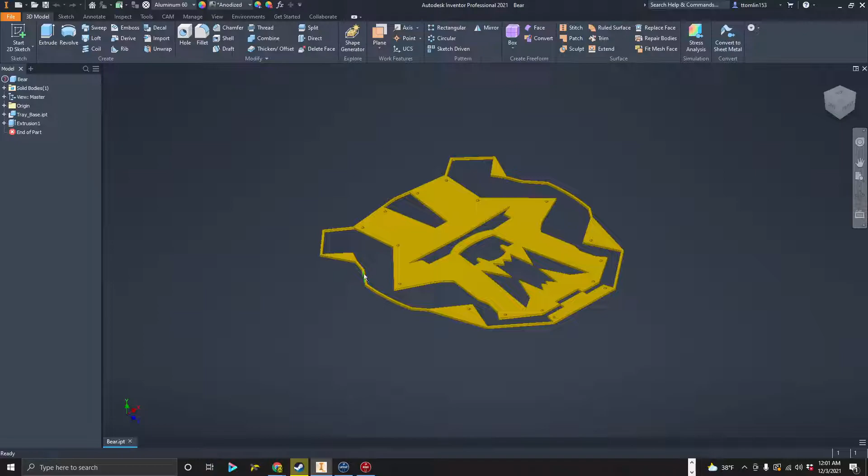Now once you've done that, we will go ahead and begin the process. To begin with, we want to go to our 3D modeling software, aka Autodesk, and if you're looking at it from this view, you want to do a top-down or whichever way you want to be exporting your view, because however you're going to export it, it's going to export what it's looking at right here. So zoomed in, zoomed out, you have to just be about right here.

Now we will go ahead and do File, we'll go to Export, we want to do Image, make sure that it's a JPEG file. We will find where we are going to be saving it, aka on my flash drive. I'll go to my drawings, I'll go to my example, and I'll do save. Now I've saved it, it will have taken this screen and put it into a JPEG.

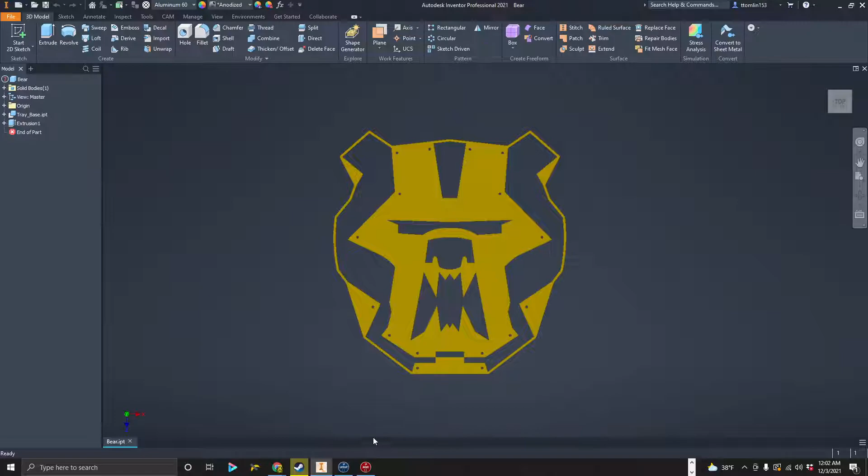After I've done that, I will go ahead and go to my convertio. I will go ahead and choose my file by going through, and there you go. Now I will convert it to a CAD DXF. We will take 2 seconds and wait, and boom, there you go. Oh sorry, still taking a few more seconds to download, it's a little bit on and off, Wi-Fi speeds. Now we will go ahead and do download, and we've got it.

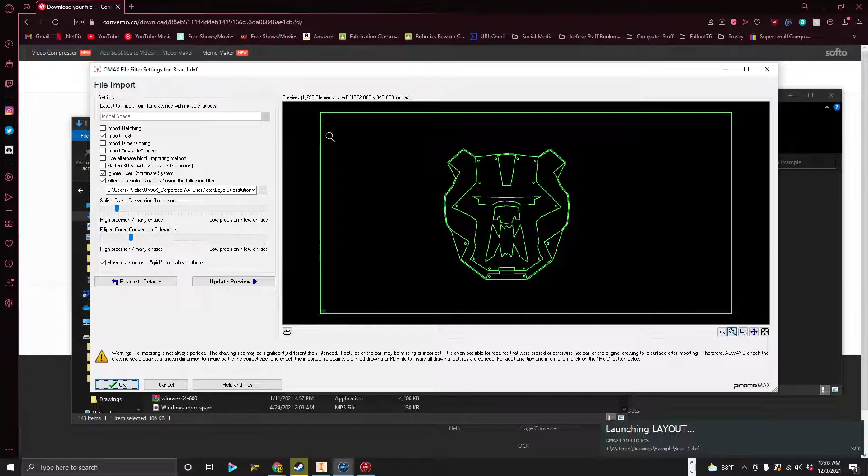So we will go to our downloads and we will open the flash drive. So this is the DXF. We'll move the DXF over to where we keep our JPEG. Once you've done that, we can go ahead and double click it, or you can open it through ProtoMAX layout, but it's better to just open it through here. Double click it, and there you go, it's popped up. Don't have to worry about anything in here, just go ahead and hit OK. Now it'll launch it up through there. Good to have it open already, because you don't have to wait for it to launch otherwise.

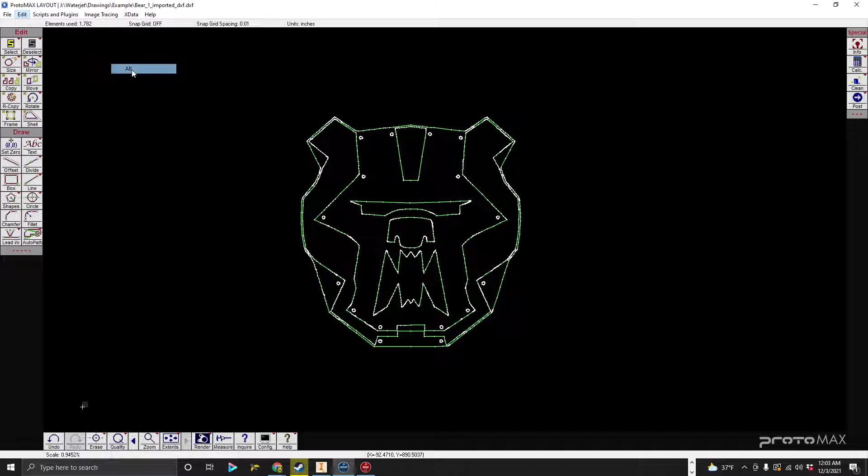Now we will go ahead and make sure we deselect all. We will go to edit again, and we will select what is connected. So we'll click this line to go ahead and delete this box, and we will go ahead and select all. After we've selected all, we'll do Control C. We will delete this, we'll hit your home key to go down here to your actual bed view. Do Control V, and now your part should be in the exact middle.

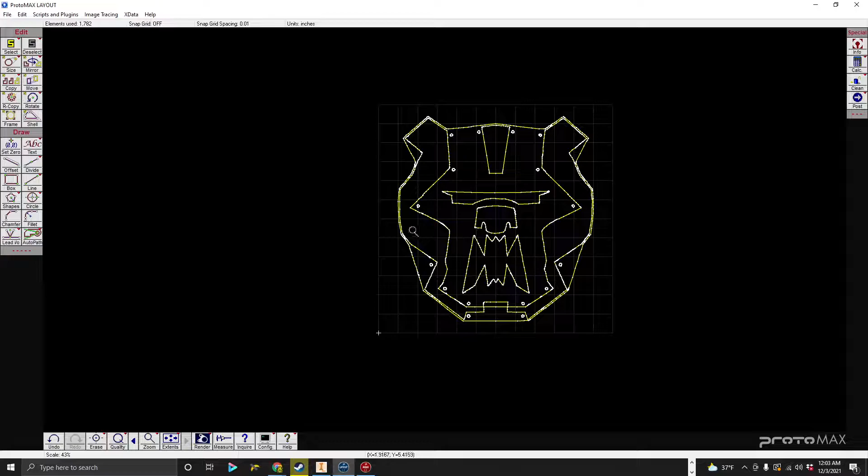Now what we want to do is scale it down so that it's not so big. In my case, I want it to be 10 inches, and it'll automatically fix everything and move it down to the bed. Remember that the Waterjet cutter is actually rather small, it's not bad, but it is only a 12 by 12 bed, each square indicating 1 inch. So you want to make sure that your parts are actually fitting within this area. If they're not, then it just will not be made, because it'll reach its limit.

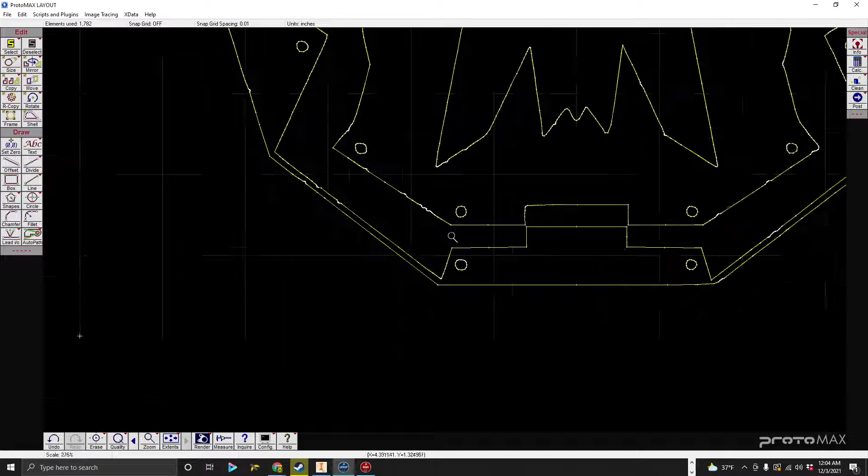Another thing you might want to worry about is weird lines like this, so for an example, I'll go ahead and fix that. Also, you want to worry about where you set your home, or your point, I guess you could say. So there's our 0, and our 0 is in that corner, just like it typically is on the machine. The machine always sets a home right in the corner. So we'll go ahead and just use that corner actually, because our stock will butt up to it.

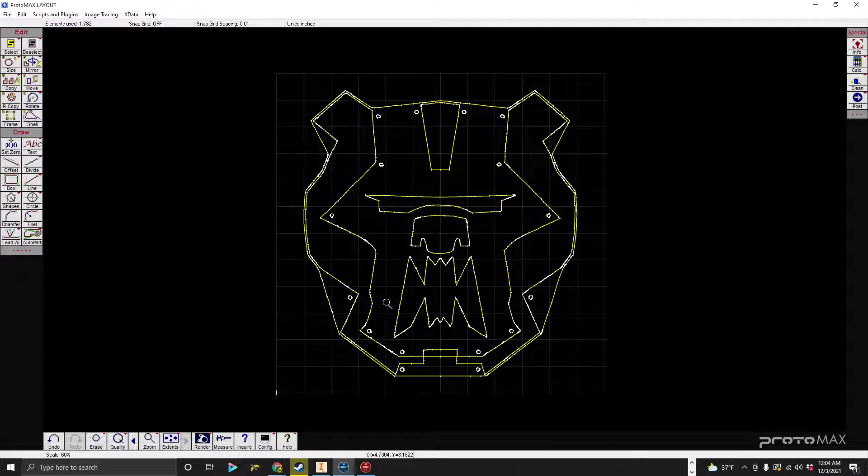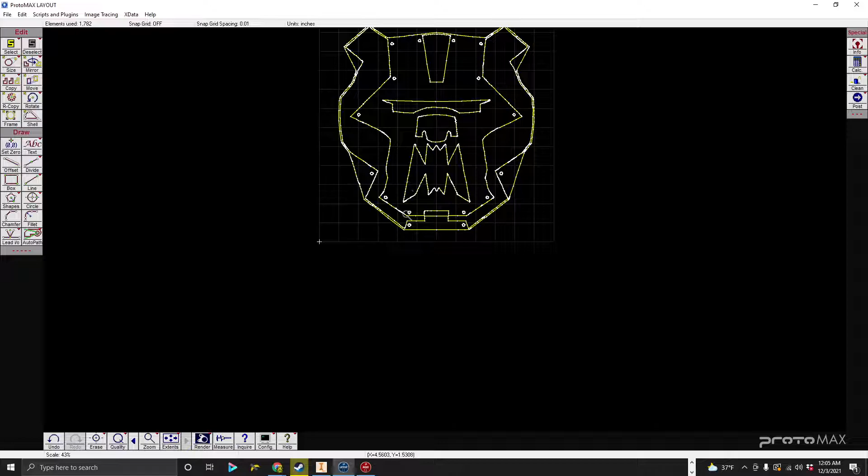For an example, my part is actually going to be connected from this line all the way from the outside back up over here to the top, and then through here. So basically this whole area that I'm tracing with my mouse will fall out. This whole area will fall out too. This slot should fall out, these eyes will fall out, the nose and the mouth will fall out, leaving only the thin, very thin plates. So I want to make sure this is connected instead of not connected, because otherwise this piece will be floppy and only supported from this very thin metal at the top.

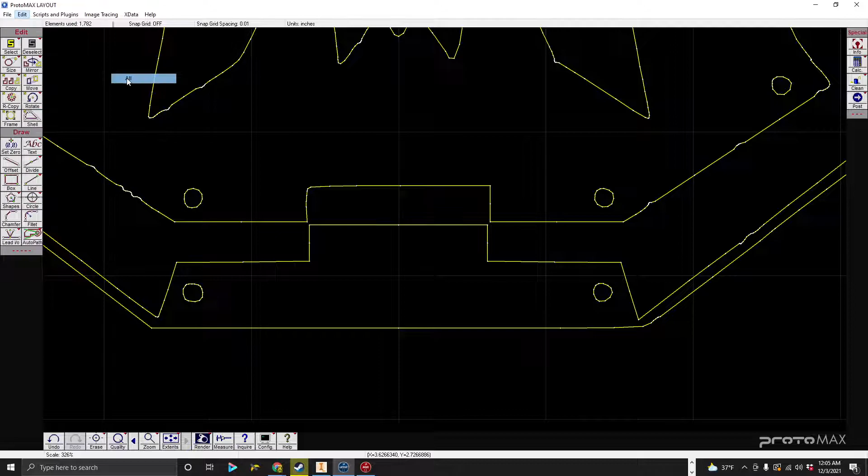So what we will do is get into edit, we'll deselect all. Now we will hit select under edit, and we will click our lines, which are separated just a little bit weird. It just happens because of the file converting and stuff like that, and the program's a little bit interesting. Now we can go ahead and hit delete after we've selected those. We want to go to line, and we want to hit endpoint to endpoint.

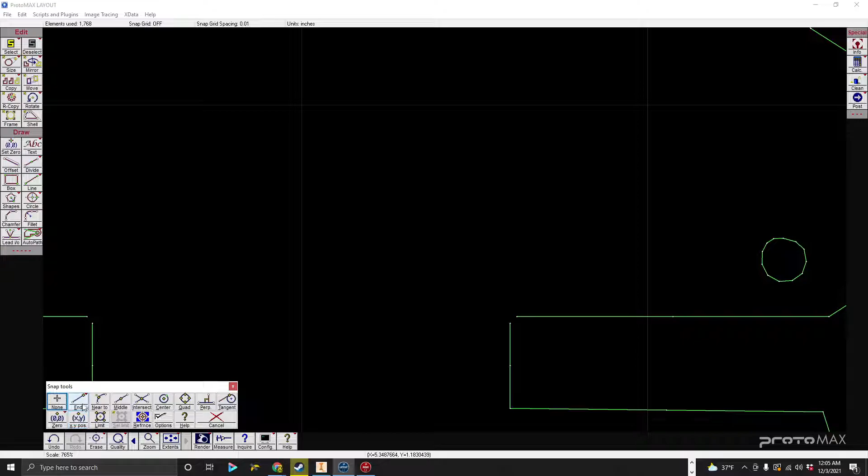So it's going to automatically select it for you. You just have to be close to it. We'll hit line, hit end, and then hit our point and connect it. Now that's connected, so it won't be floppy, and it actually has a point of connection.

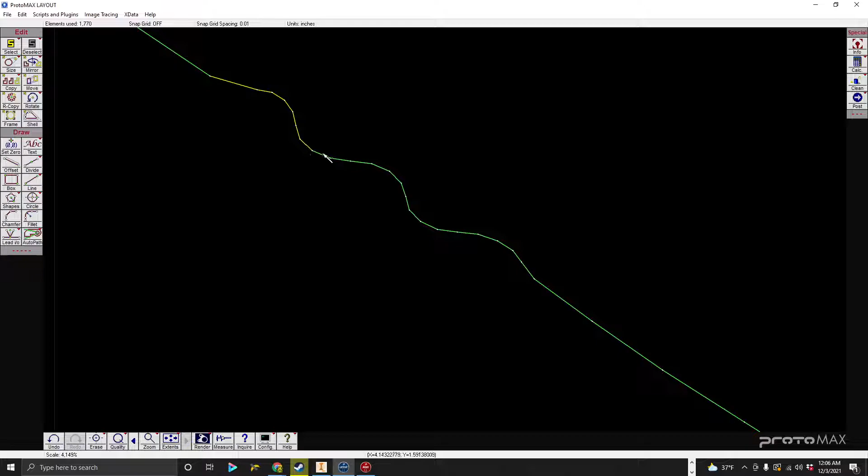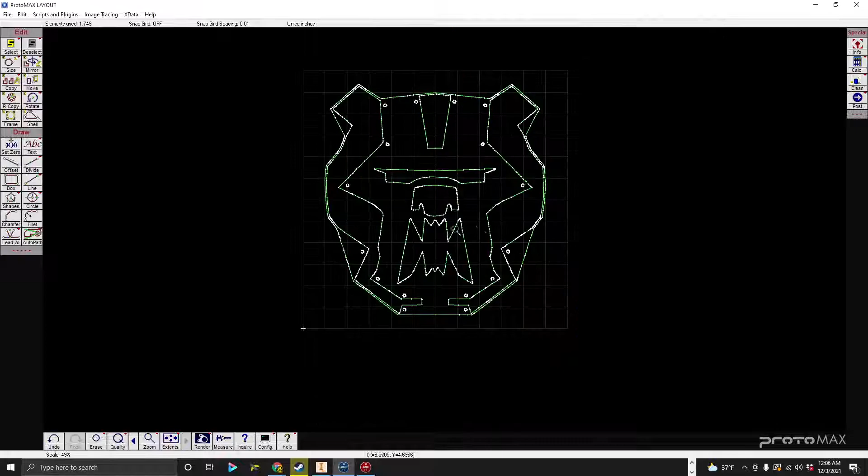For example's sake, I will go ahead and select all this. You can just hold your mouse down and trace it, and there you go. Go ahead and hit delete. Now we'll do the same thing: a line, an end, from here to here, and that will have made it straighter, at least. In this case, we'll make sure we don't have anything selected, and good.

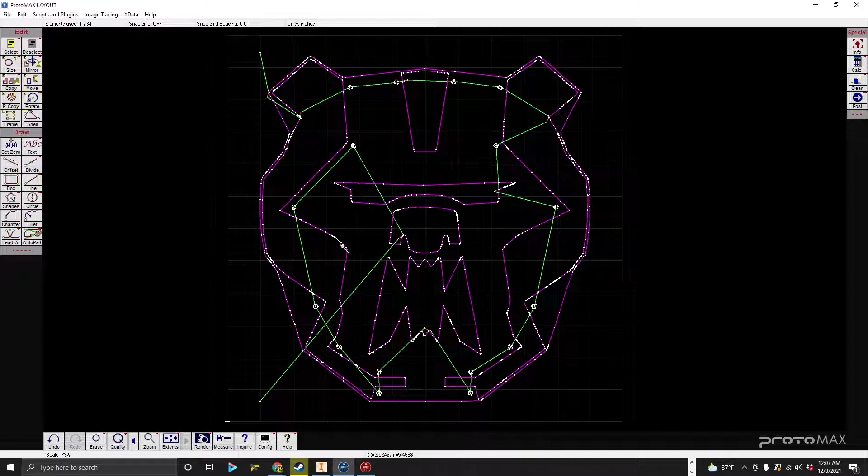Now what we can do is our auto path. It'll auto generate all of our cutting for us. You want to make sure to double check all the areas like this. It becomes white because of these teeny tiny turns the machine will be taking, but the machine can do it. If it can't, it just makes a less accurate line. It could make this wiggle instead of an actual straight line, or vice versa, because it'll figure it out. But once it's automatically generated, you want to make sure your lines are not purple, meaning they are not cutting lines.

These are transversing or moving lines, which will be moving from location to location, meaning not shooting water, so it won't cut your part up, unless it reaches the areas that it needs to.

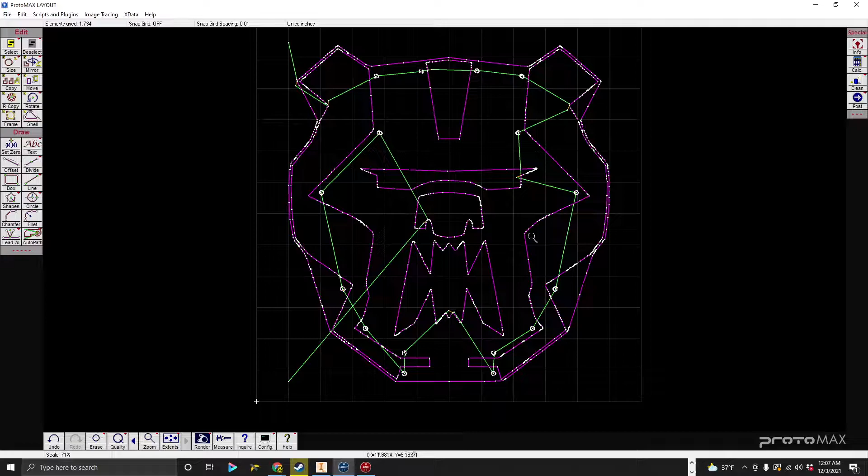So we can go ahead and do post-processing after this. Yes, we've already generated our toolpath. Sometimes, here's another thing with this ProtoMAX: sometimes you have to do a Control-Z, re-toolpath, automatic toolpath, and then try to post-process it.

You must save your drawing. Oh, here we go, yeah, you also want to save it. So we'll go ahead and hit save. I'll save it under example, Bear 2. There we go.

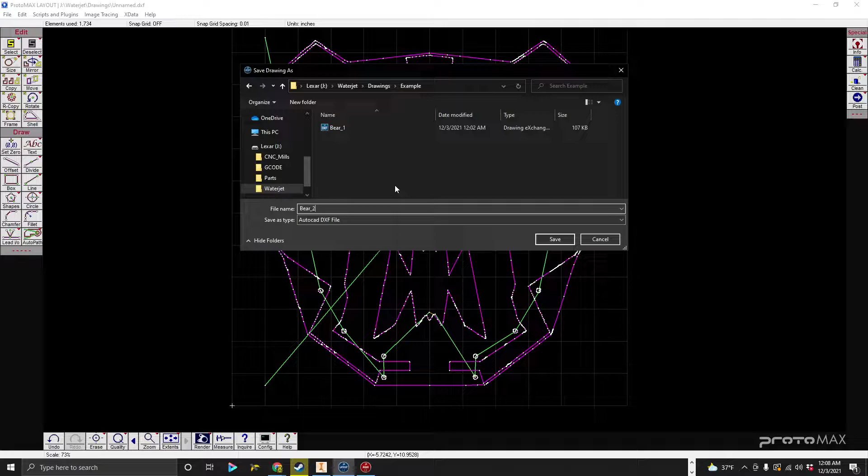Now I will post it. I will select my starting line. It would be better to select the closest point from your home, because your tool should be starting from here and moving over to the rest of the machine. So we'll select that as the starting line.

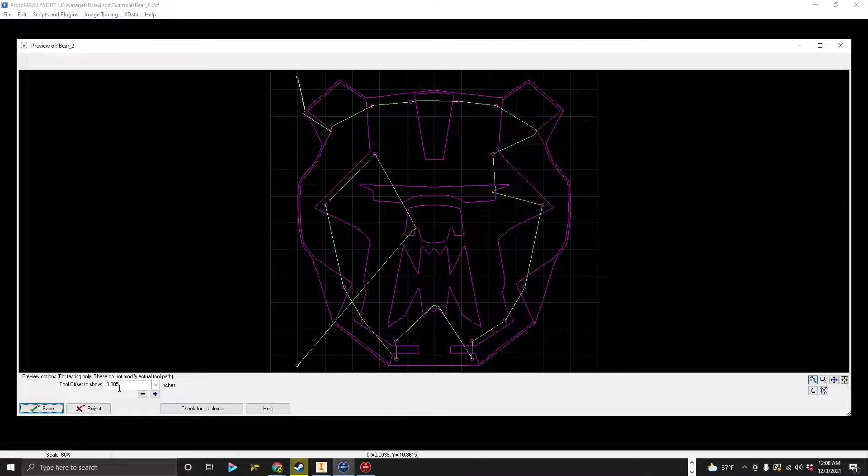This just gives you an idea of, if the machine were to be off, how far off would it actually be from the line. I typically bring it down to 5 thousandths, just so it's tighter and easier to see. Again, everything in red will be cut, everything in green will be a transversed or moving point.

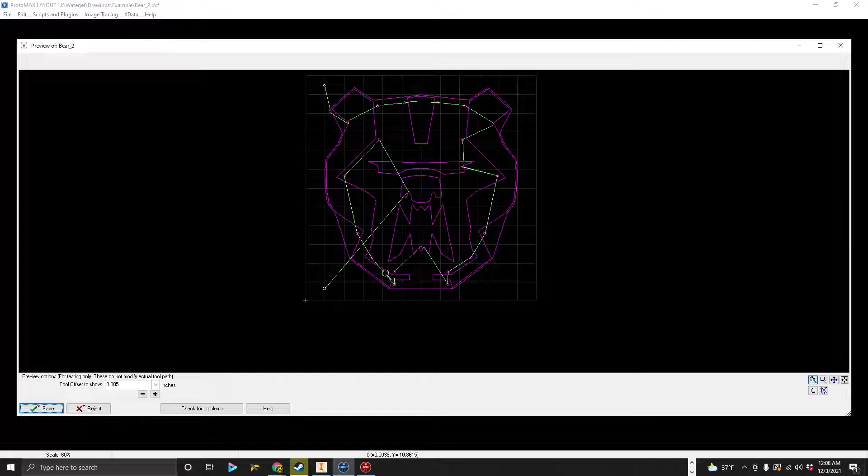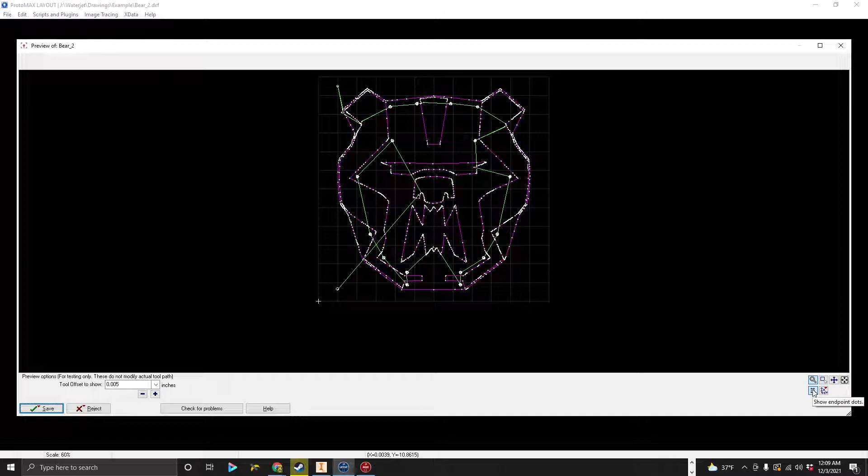Now, once we've done that, you can check the way your machine's going to be moving. It generates these arrows, so my machine will be moving, cutting over here, coming back to this point, moving, cutting, etc. I believe this one just shows you your endpoints and dots that are connecting - just little things that are interesting to look at. That's all just moving stuff, don't worry about that.

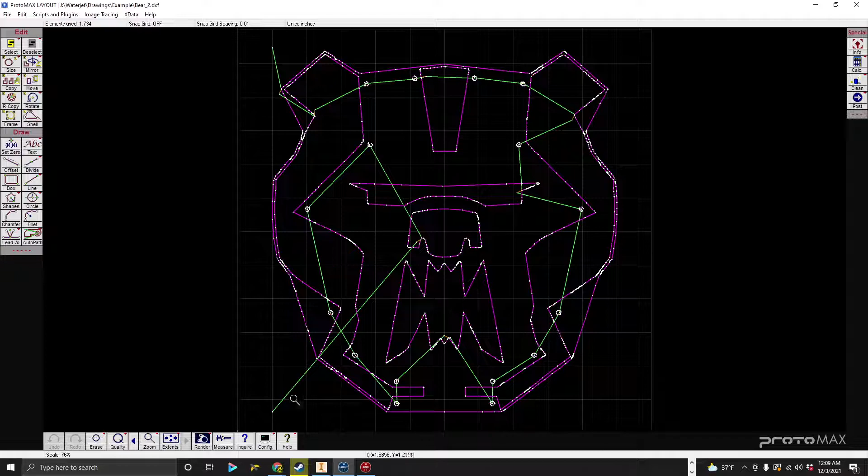Now we can go ahead and hit right click, hit save as OMX, and save it as OMX Bear 2. There we go. Now we will go over to Make, which will actually be on the machine.

Now you can do File, Open, wait for it, and then we will go over to where our location is. Open it up. Here we go. Select the OMX file, and go ahead and hit OK.

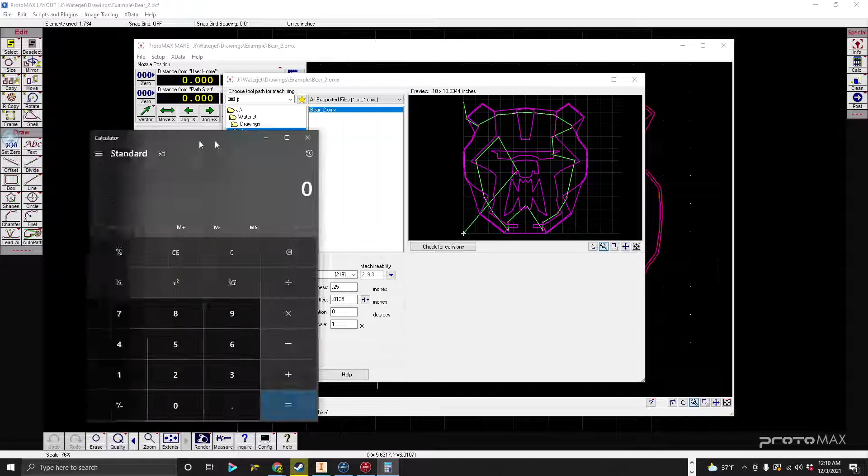Sorry about that. A few things you want to worry about before: this is actually going to be 16th inch stock that I'm going to be using, so we will look at our thickness and do 16th. I always forget, I think it's 0.0625. We can always double check by calculating that real quickly. Even right here, drag your calculator, 16th, copy it, and then you can just pop it over in here.

I am doing 6061 aluminum, but there are tons of options for your material. Most commonly you will be using under the metal section, obviously, so you always want to double check what your metal actually is. Common steel types would be stainless, and we also use some tool steel, but hardly. Again, I'm going to be using aluminum 6061. This will change speeds and feeds of the machine and all sorts of stuff.

And then tool offset is going to be how high the actual water jet is above the piece. So we can say enter the amount of the offset from the jet to the part. You can change this if you want. I'm gonna make it like an eighth instead of 10 thousandths, more of an eighth, which is a little bit goofy whenever it's like that.

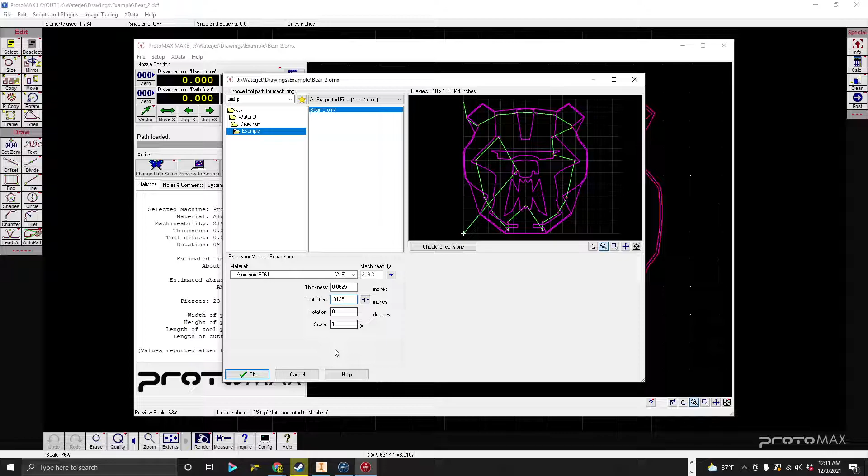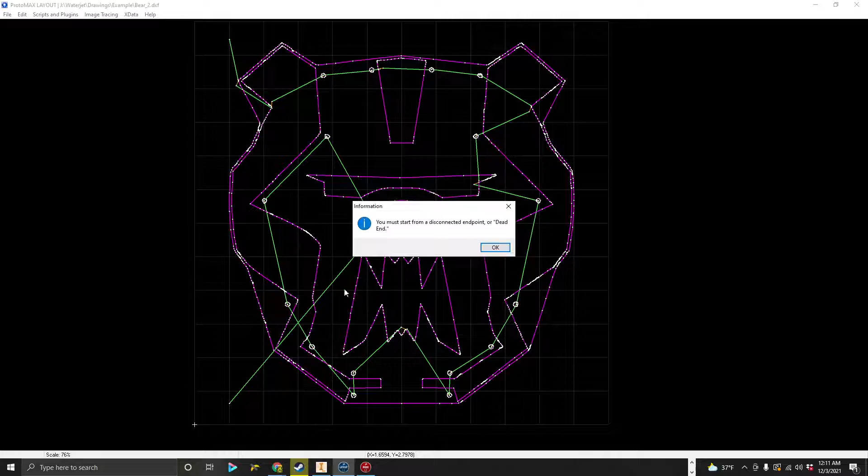And there you go, so we can go ahead and hit OK, and it will load up after it takes a second. And there you go. So again, your home is going to be in the corner, just like we did in the post process of it all. Again, that's our home, and then it will make everything from beyond that point.

Going back to Make, I dragged it down. There you go. That will be ProtoMAX Make, part making.